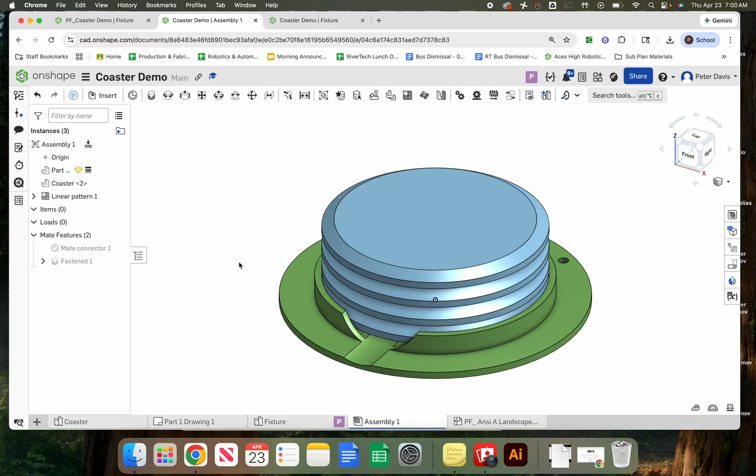In the previous tutorial, we created the fixture, and the one before that, we created the coaster. So now what we're going to do is we're going to create an assembly, and we're going to show you how to do a linear pattern so you can stack up four inside here. So let's go back to our demo file.

All right, I have my fixture, I have my coaster. I'm going to set my part name over here. I'll right click and rename this to fixture. Okay, and then in my coaster tab, I'm going to do the same thing, right click, rename this to coaster. Okay, and that will make my life easier when I do the assembly.

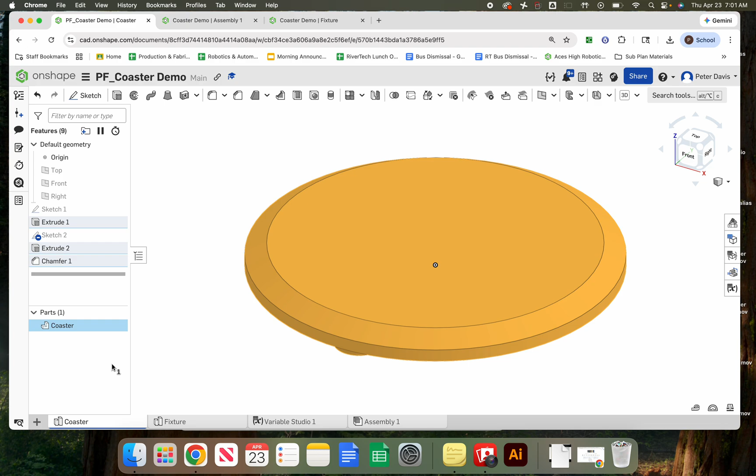So now I'm going to go to my assembly tab over here, and I'm going to insert. The first thing I'm going to do is bring in the fixture, and I'm going to green check. Okay, without moving it, I want to right click on it and fix its position, and that locks up my orientation for front, top, and right side.

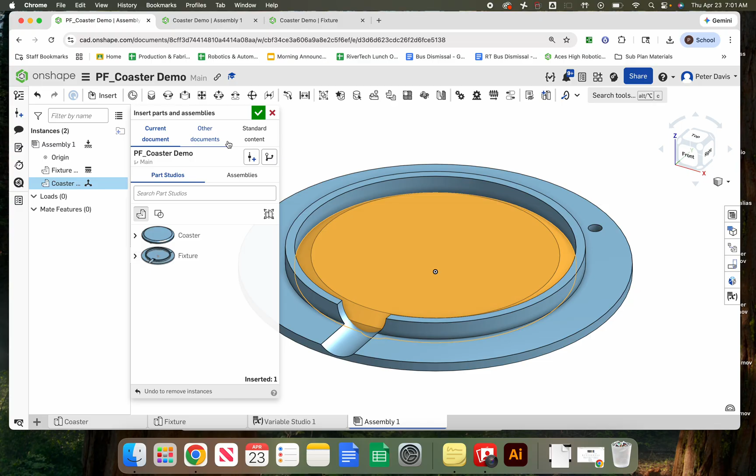Okay, next thing I'm going to do is I'm going to go back to insert, and I'm going to bring in the coaster, and I'm going to green check. All right, you'll notice I can move the coaster around, but if I try and click on the fixture at all, it is fixed. It's not going to go anywhere.

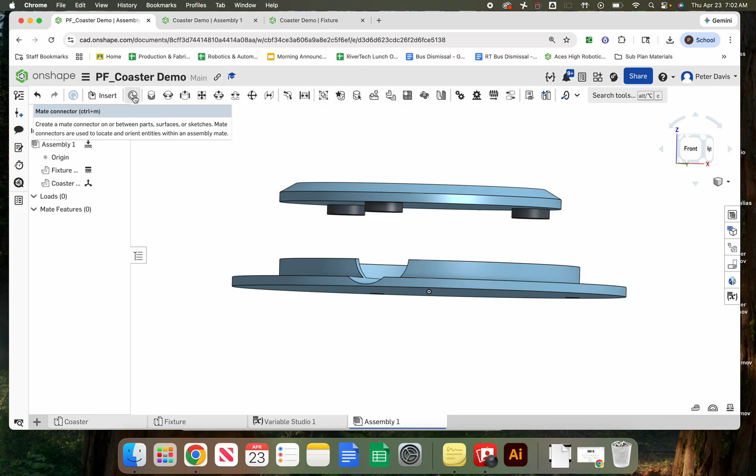So now what I want to do is I want to create a relationship that allows me to stack these in here. And to do that, we're going to use mates. And to mate it correctly, we need what's called a mate connector. All right, a mate connector gives us both location and orientation for how we mate these two pieces together. So I'm going to go to my mate connector.

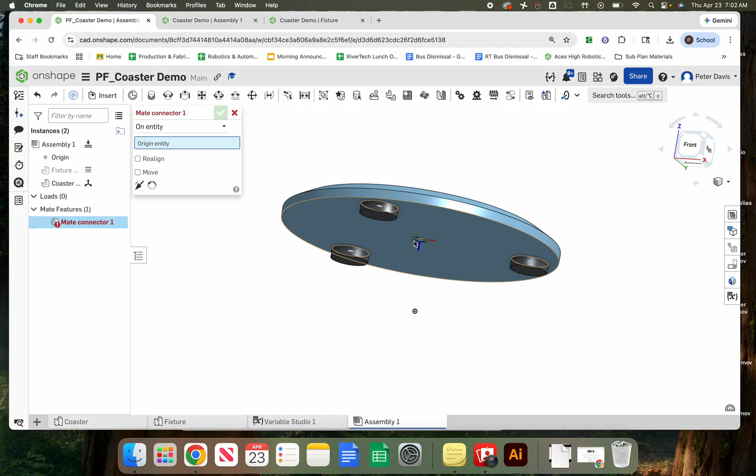All right. And in this case, I'm going to turn off the visibility on my fixture. Okay. I want a mate connector that is centered on the slate, but is offset by the thickness of these pads. So I'm going to grab the middle of the slate. All right. And unfortunately, if I look at this from the front, you'll see that mate connector is even with the bottom of the slate. And I need it to be even with the bottom of the pad.

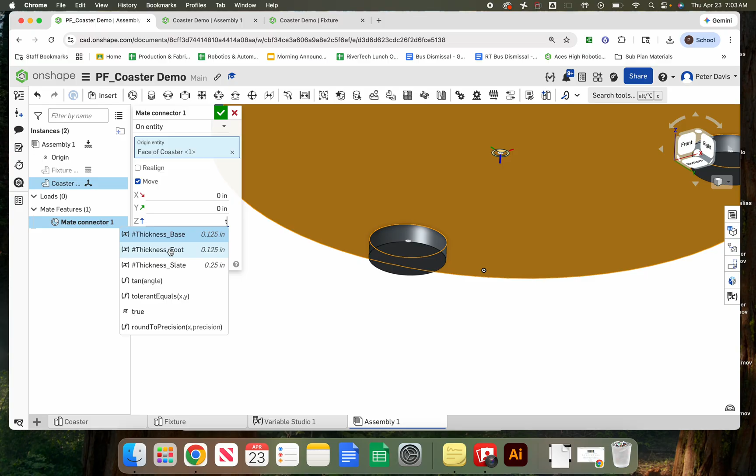So I'm going to go over here and I'm going to select move. And if you look at the mate connector, you'll see it has three little tabs coming off of it. It has a blue one, a green one, and a red one. Those indicate the directions for each axis. In this case, the Z is the blue one, and I want to move this down based on the thickness of the pad. Okay, so I'm going to set that to thickness of the foot, and I'm going to green check.

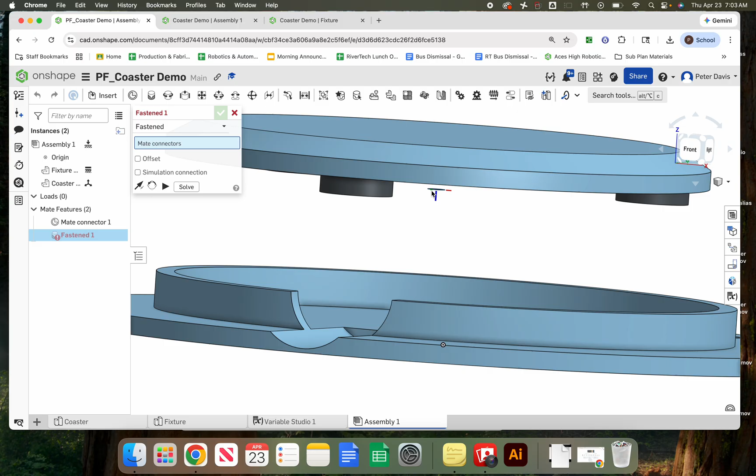So now that I've used that variable studio to drive this, I now have my mate connector where I need it. I'll turn the fixture back on for its visibility. And now I'm going to mate this with a fasten mate. So I'm going to go over here to fasten mate. I'm going to select my mate connector to begin with. Then I'm going to come down here to the bottom and I'm going to select this outside bottom edge. And that locates it for me.

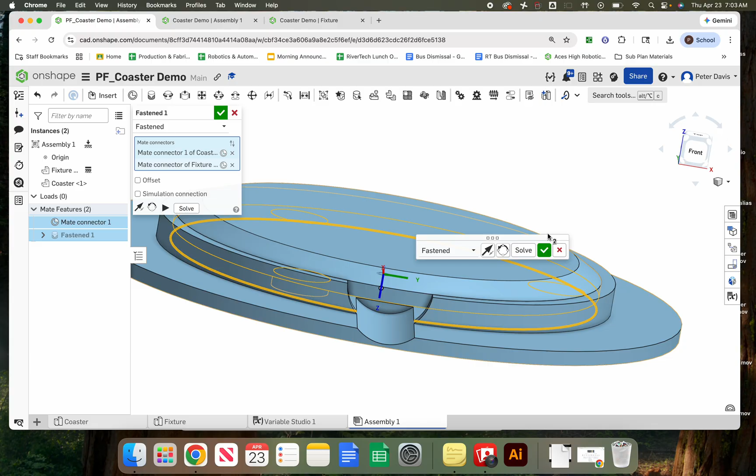Now, one issue I have is this pad is lining up right in the finger well, and realistically, I wouldn't do that in real life. So I'm going to use the secondary axis, reorient secondary axis to rotate this. All right, it rotates 90 degrees, and it takes that pad and moves it out of the way. So now I can green check. All right, and I can close my fasten mate.

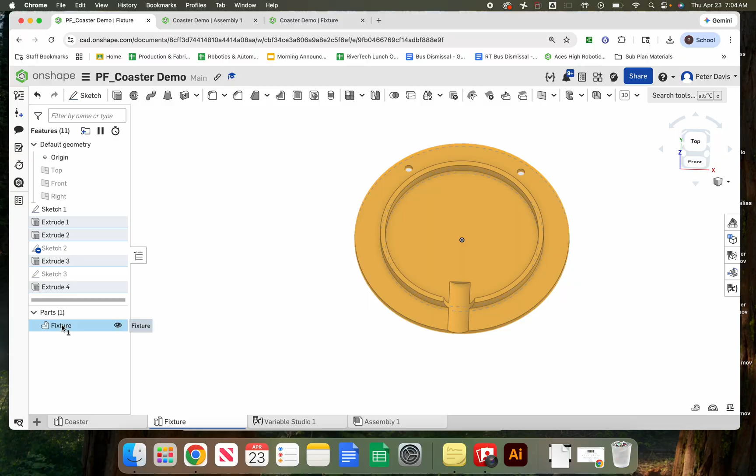So that's done. One other thing that would be handy to do right now would be to change the color on this, so I have two different colors. So for my fixture, I'm going to come over here and select my fixture, right click on it, and select it. And I'm going to edit appearance. All right, in my case, I make it green. And that's better. Green check. All right, so now my fixture is a different color.

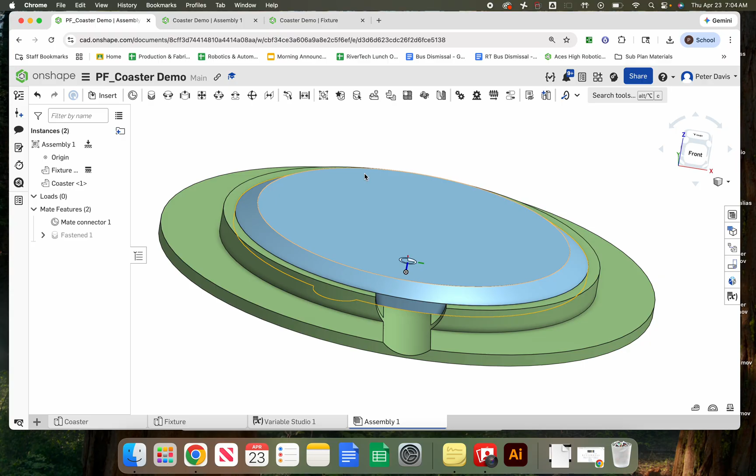So now when I go back to my assembly, this should update. There we go. So last thing I want to do is I want to stack up three more on top of this. So to do that, I'm going to use my linear assembly pattern. So I'm going to assembly. I'm going to choose what it is I want to make copies of.

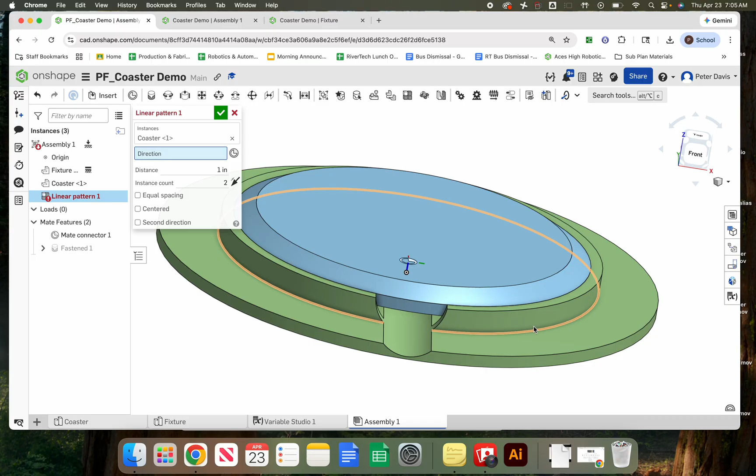And then for my direction, all I have to do is choose any cylindrically vertical face. So this face goes up and down and it's cylindrical. This one is also cylindrical, up and down. And what that's going to do is set my direction for me. Now, in this case, it's going in the wrong direction. So I'll use the little flippy arrow here to change it to the opposite direction.

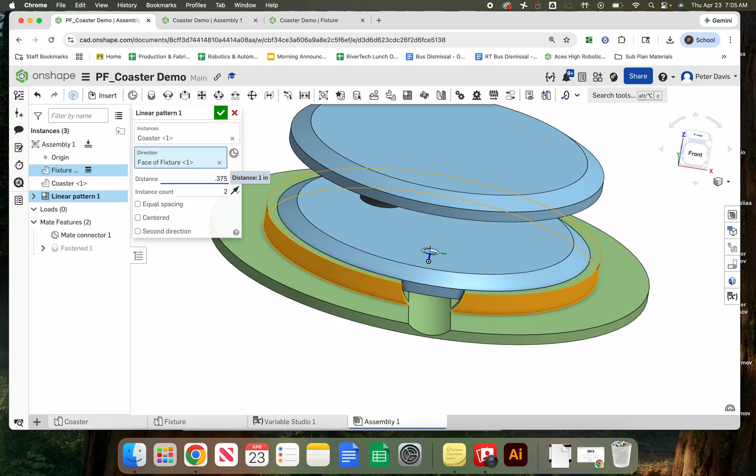And then the next thing I need to do is put in the total thickness of both the foot and the slate, which I know to be 0.375 in my case. All right. But what if you didn't know, right? What if you weren't sure? Okay, where can I find that? So I'm going to green check.

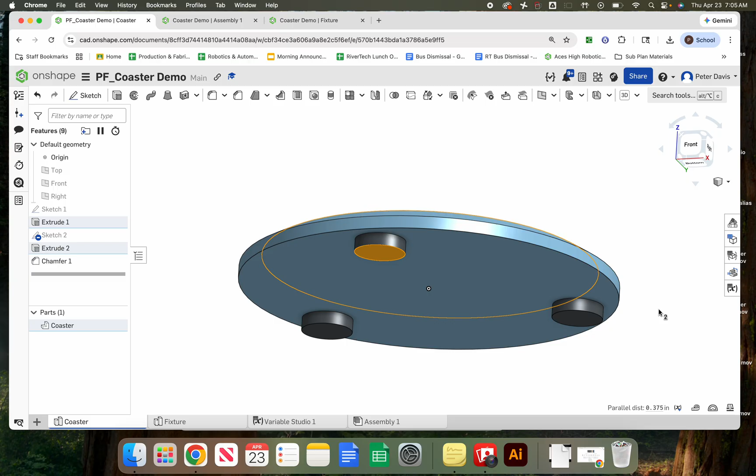And let's say I didn't know the thickness. I can go back to my coaster. I can select the top face, and then I can rotate and select the bottom face. And it shows me my parallel distance between those two faces is 0.375. So there's my total thickness right there. And I can go back in here and just double click on the linear pattern and update that dimension. So I green check. So now I'm done with my assembly.

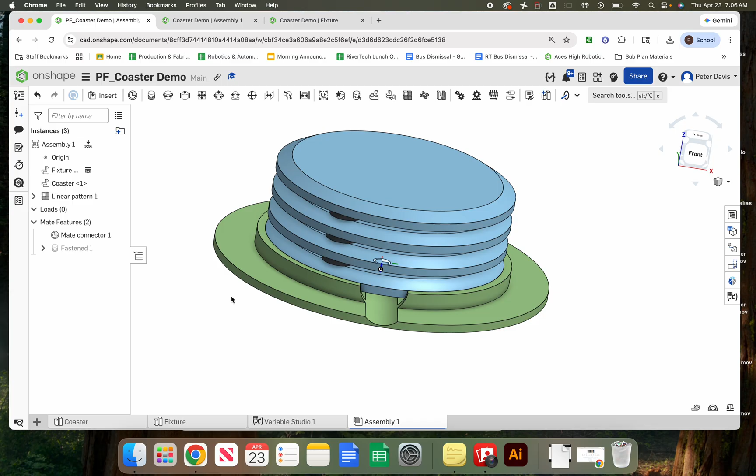All right. So after this, it's going to be your responsibility to create drawings for each of these pieces: for the coaster, for the fixture, and for the total assembly. Good luck.